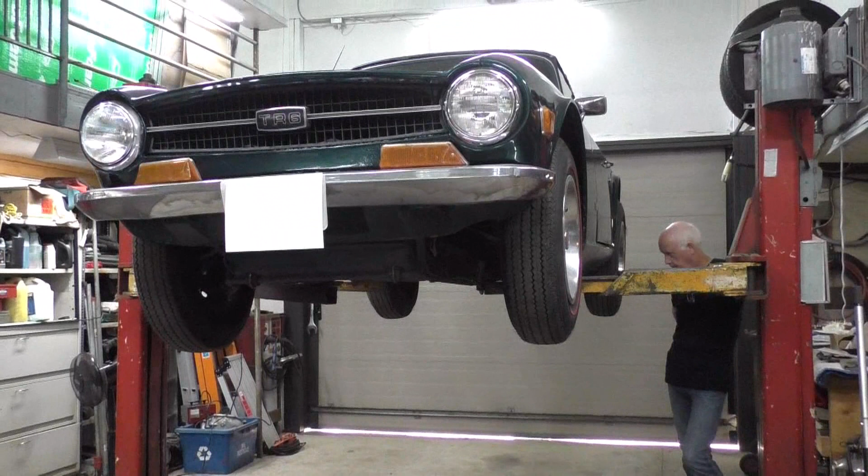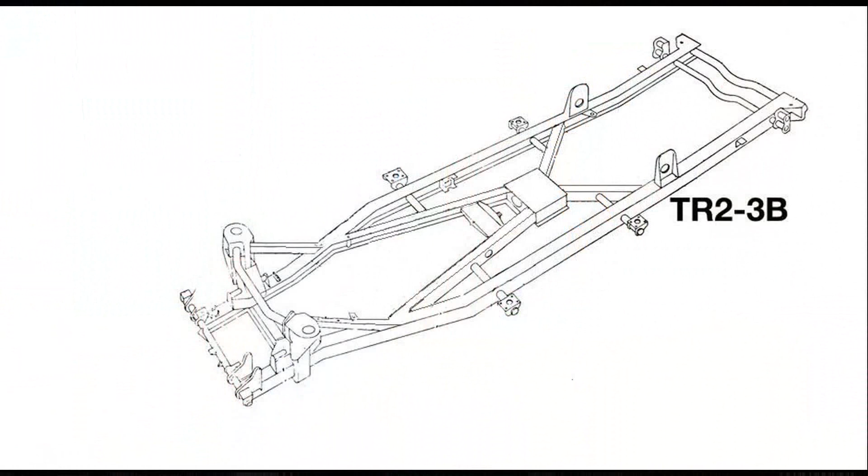Now, what I'd like to do is explain a bit about the frames on the Triumphs first, on the TR models. All of them except the TR7 and the TR8. They started off with the TR3s and the TR2s, and I have a diagram of a frame now, and as you can see on the frame, it's an old ladder type frame. A ladder frame just runs with two rails from front to back, and all the suspension hangs off it, and so does the body bolted to it.

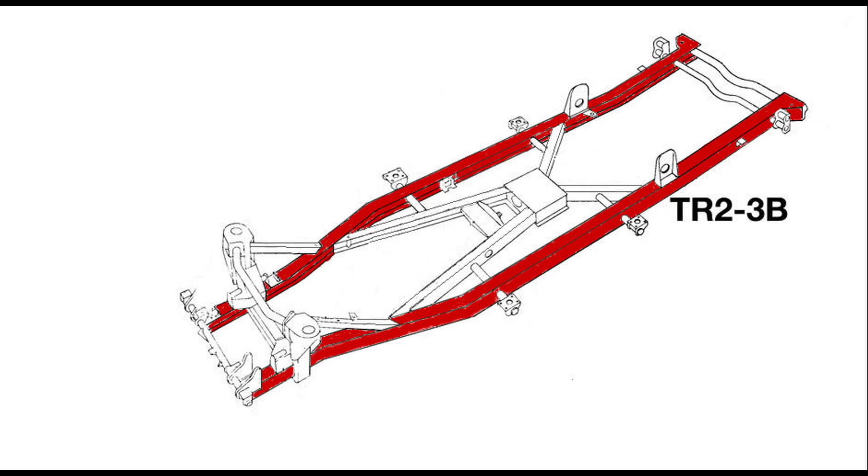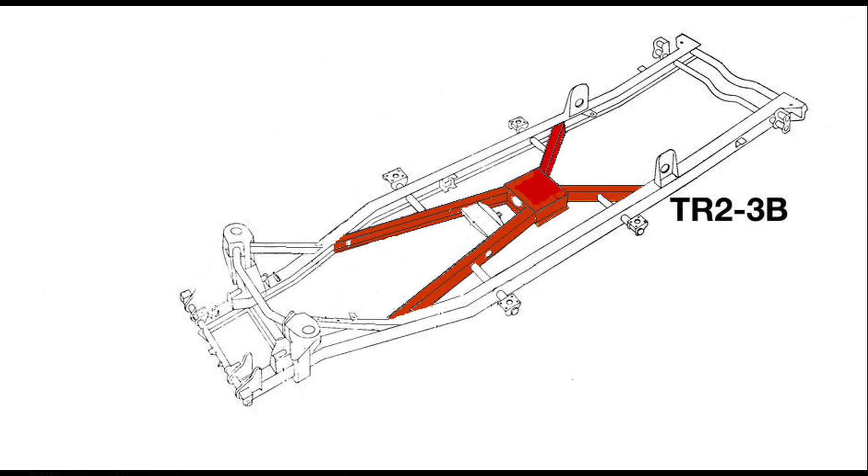You can see the two rails outlined in red, and these are the two frame rails, and as I say, they run from front to back. The problem with the ladder frames is they have a lot of flexing. They twist from one end to the other. So one of the ways that you can stop this happening is you put a cross piece in the center. As you can see, the cross piece goes from the front of the rear springs down to the tower support on the front for the independent suspension that's on the front.

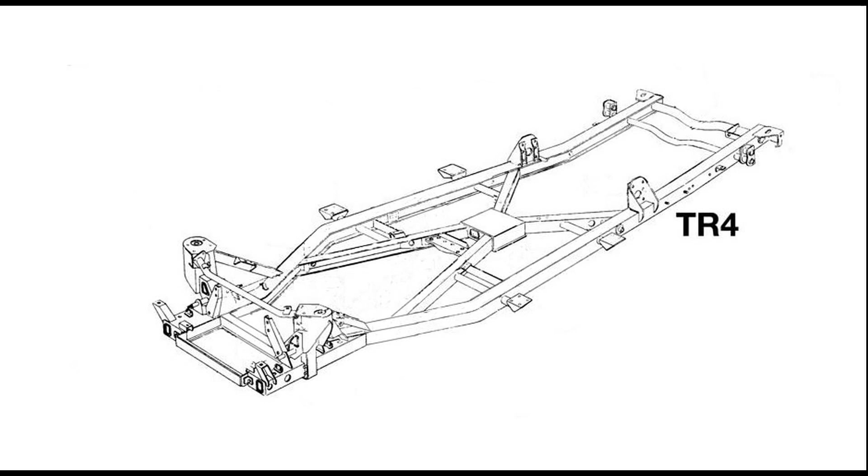Now if we go to the TR4 frame, you can see it's almost the same, except the frame rails are wider apart on the outside. This gives the floor more room inside the car. That's what they were looking for. And it gives the seats, you can put bigger seats in, all that kind of stuff. But it makes the car just a little bit wider.

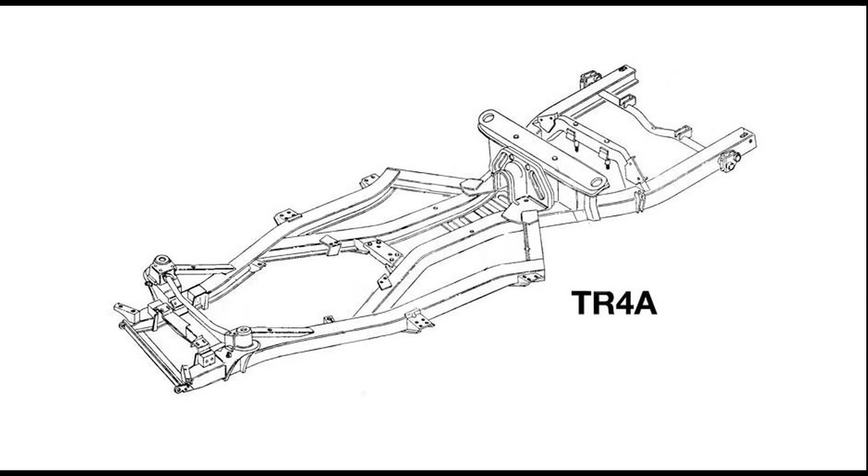So now progressing from the TR4 frame to the TR4A, where they put an independent suspension in the rear. And this changes the frame dynamics completely, actually. It's a whole different thing. But as we look at the picture, there are two main changes in the frame. There's an independent rear suspension, of course, but if you'll notice, there's a doubling of the frame rails. There's two sets go down.

Now you can see the frame rails supporting the independent suspension at the rear, and then going forward to reach the piece close to the tower supports. But instead of the cross in the centre, the support has basically moved to the outside of the frame rails.

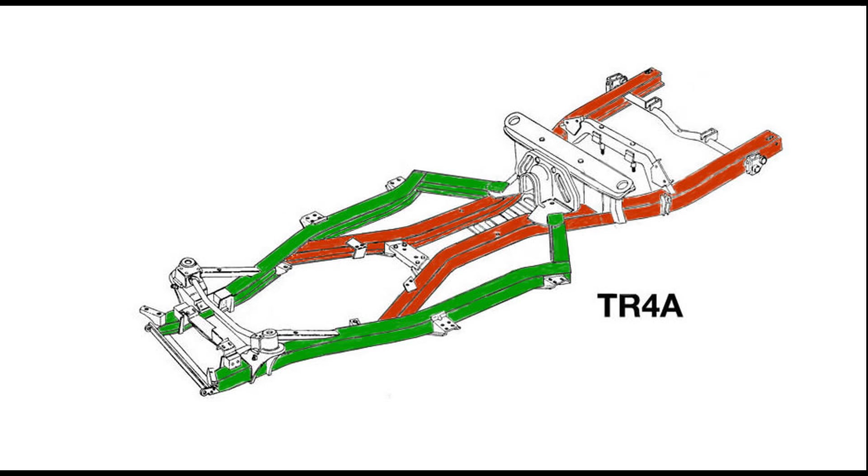Now the effect of this is that it makes the frame seemingly a lot wider, but what it's doing is connecting to the body now further out, nearer the sills and the rocker panels, and it's supporting it near the back. So in effect, it's almost like what GM used to call a perimeter frame. The frame's all the way around the outside of the body rather than just being on the inside.

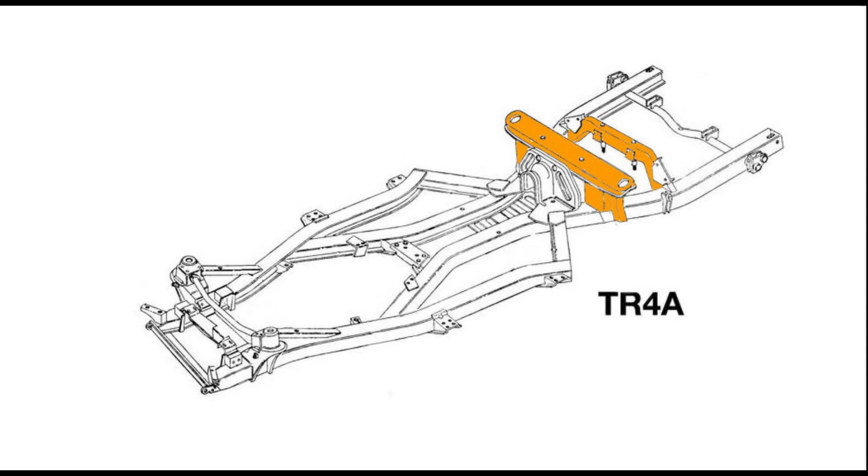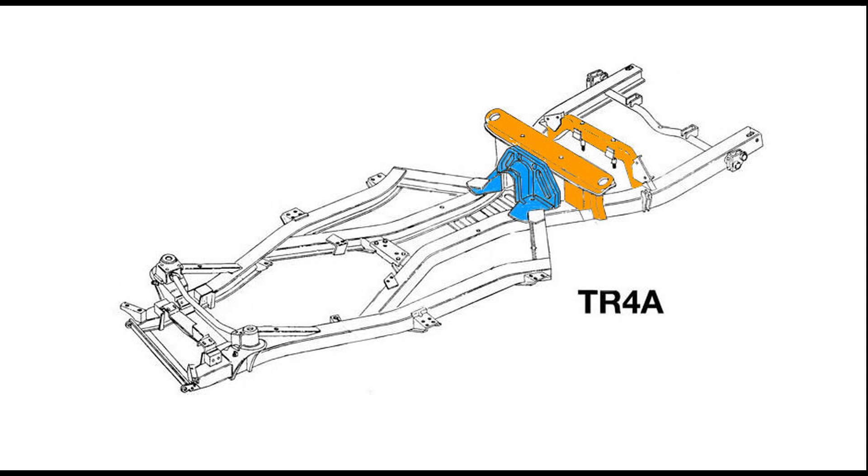Now notice where the diff is fastened to the two cross members, and they're 6 or 9 inches above the main frame rail. Now in front of it is a support that takes the torque of the diff and passes it to the main frame rails, because it's welded to it, so it passes the load and the torque all the way down through the diff into the main frame rails from the cross member where the diff is mounted, because the diffs are not directly mounted to anything else outside the cross members.

Just to explain things a bit further, when the differential is driving the wheels forward, the differential has a torque reaction of wanting to go backwards. So the thing it's trying to do is lift up the front of the frame. Now as we look at the picture of a TR6 frame, you can see that they've made some modifications. Some of them to me weren't really an improvement.

They took away the main support from the actual cross member supporting the differential, where it fastened it down to the frame rails going from front to back. What's happening now, the torque reaction from the diff through the mount is pulling the cross members back, while at the same time the wheels are pushing on the trailing arm mounts, and that's putting stress on the now unsupported frame rails.

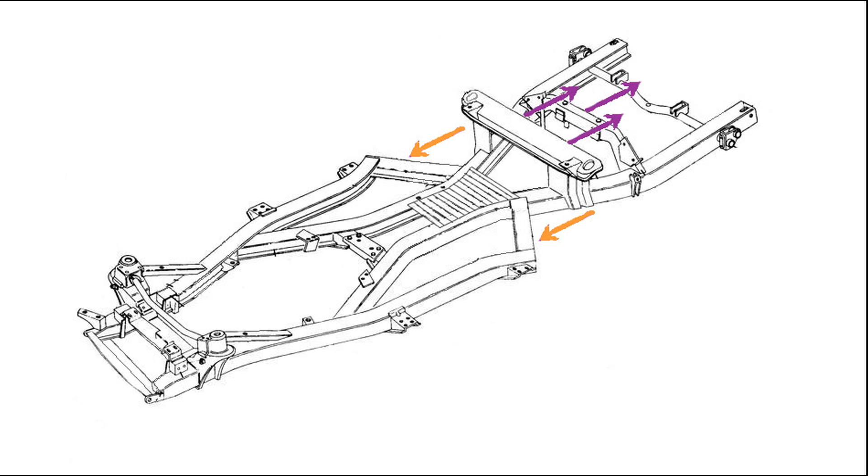Notice where the support on the TR4A is, where it's positioned, and now it's missing on the TR6 frame. So what happens, the frame starts to bend upwards just as a result of the stress and the twist, virtually the twisting motion on the back end of the frame.

I'm not saying that Triumph did a really bad job. I don't think they expected people to be driving the cars 50 years later than when they built them. Plus there was financial stress at British Leyland during the 70s, to say the least. That's when these cars were built. Penny pinching was the way to go. Unfortunately, the bit that they took out of the frame, I don't think it was a good idea.

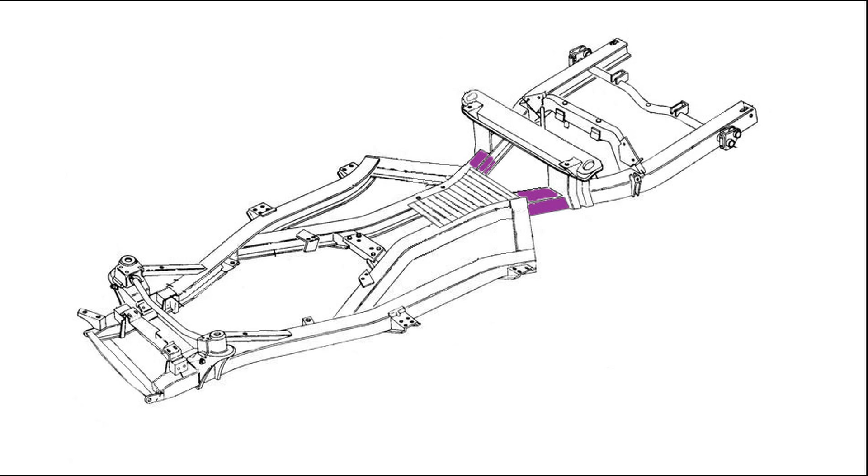But anyway, when people replace the arm that the trailing arm fastens to on the chassis, they don't look at the small section in between. And you might think, from what I've been saying, that there will be big holes in it or big cracks, but actually it doesn't work out that simple. I just want to show you something.

This is on a different TR6, one that has decent door gaps, but I'll show you how much movement there needs to be in the frame just to produce 1/2 or 3/4 of an inch movement on the top of the door. So we'll go and do that now. So I'm looking at the door gap on a different car. This isn't the car that has a problem. This is actually a fairly good car. It's got a nice door gap all the way down.

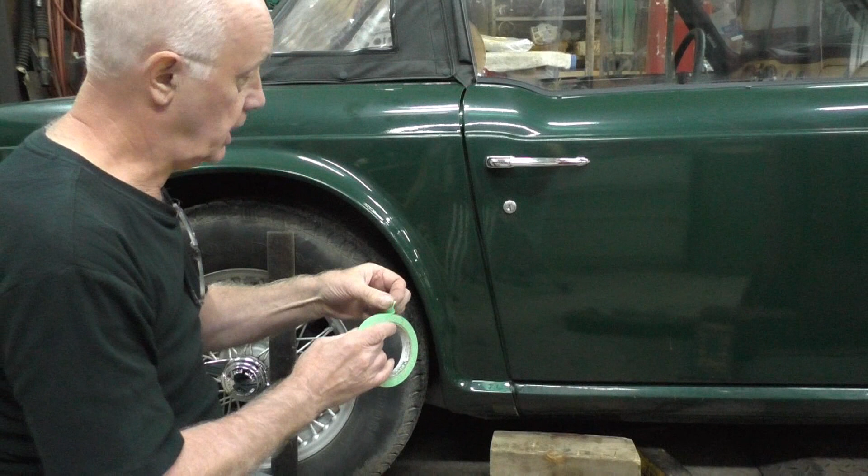But what I wanted to show you was, if you can just imagine this first, that the frame for the car is level with the rocker panel. The bottom of the frame is about the bottom of the rocker panel, and the top of the frame is just about where the top of the rocker panel or the sill is. So I'm going to get a piece of tape and stick it as a straight edge for us to use on here.

And then on the bit at the top, I'm going to stick it across, and I'm going to measure off here, calling this a door gap. I'm going to measure about 1/2 inch there. So that's what we're going to call the door gap. Now the depth of the frame is the same as a rocker panel. So I've got my straight edge here. I'm going to put this down on my block of wood, so I don't have to try and support it.

Now, if you imagine that this is the depth of the frame, that's the bottom of the frame, and this is the top, and our door gap is fine where it is. Now I've got to put my glasses on for this.

So now I move out the bar just to get a door gap of 1/2 inch. If you notice down here where the top of the frame is, we've only got probably less than 1/16 of an inch of movement on the top. So that's how much movement there needs to be in the frame to end up with 1/2 inch of a door gap. It's 1/16 of an inch or less.

So it's not like there's going to be big cracks or marks or anything else in the frame. That can deflect on the frame without too much trouble. 1/16 of an inch, even though it's small in frame terms, it's quite a bit in steering geometry and everything else. If you think of it the way that the frame's moving, if that's the bottom of the frame and now it moves to there, it gives you 1/2 inch, you've moved barely 1/16 of an inch.

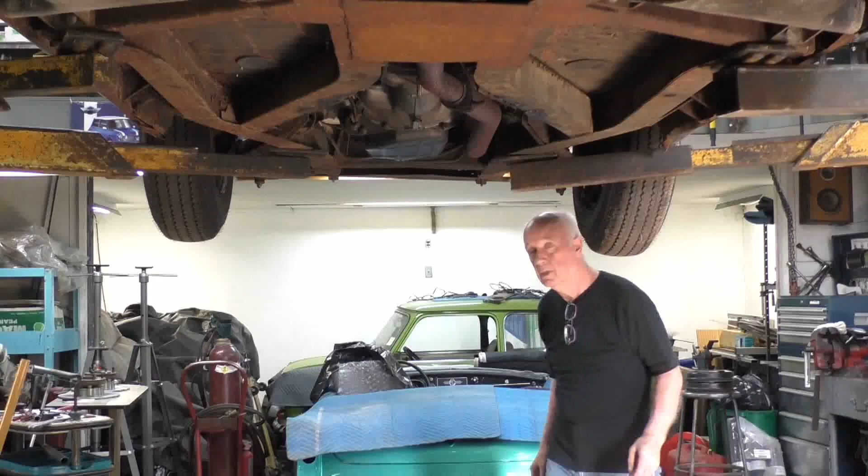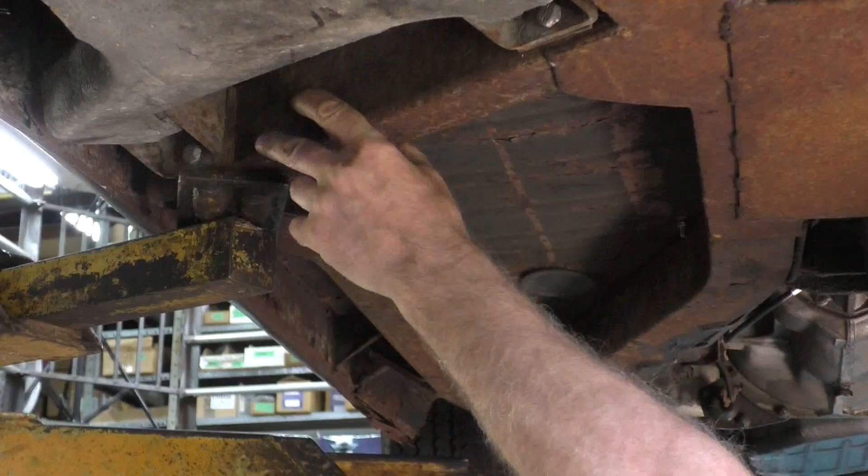Anyway, we'll go back and have a look underneath the bottom of the car. If we look on the back section of the frame, you can see there's holes in it already, it's rotted. And the arms on the side where the trailing arms for the suspension go have been replaced with a rectangular tube that's solid, and it looks like it's 1/4 inch thick. It's just been welded into the plate.

And then the centre section where it goes under the frame, where the main frame rails go from front to back, they've just had a 1/8 plate stuck on there and welded, and inside here you can see it's slightly rotten, and it's very weak around the top and right around here and down on the leg. And the area that I was talking about on the diagrams, between where the differential comes down and where it starts again where the arms are, that gap in here is really weak. You can see it and you can feel it because the metal's crunching.

So the amount of movement I need in here is very little, and after looking at the frame you can see exactly the area that's going to be a problem. And it is a problem because the door gap's opened up tremendously. And as I say, it's rotten all the way down there. And then move down the frame here and look along the sides on the main frame. It's not very good. We're looking at iffy bits.

And again, there's been little plates welded onto the arms. The rocker panels haven't even been welded. Somebody's put them on the outside, just folded them over and left the fold to keep them in place. And the same on this side here, you can see. And there's actually holes on the inner fender, which are pretty bad all the way along. Keep going down there, there's bits falling off, there's just holes everywhere. Pretty crappy.

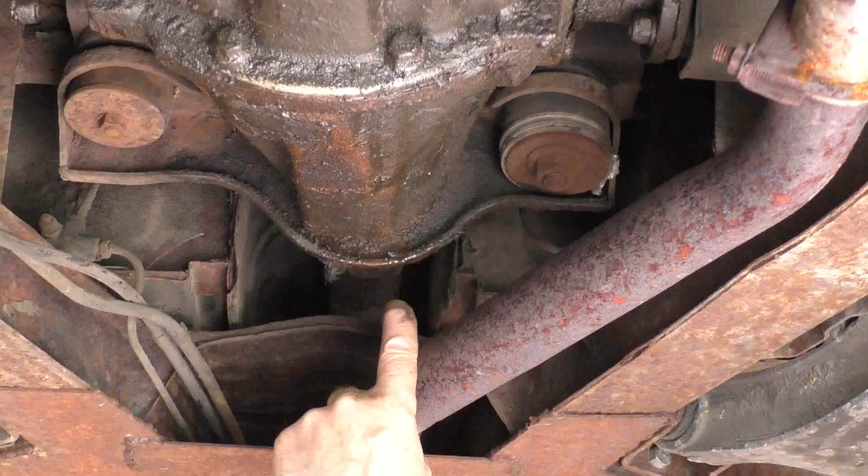One of the other things too, on the differential, all the bolts have been changed. The repair has had a piece put in the top and just bolts put through, but unfortunately the differential now is offset and it's also tilted, so the diff isn't in the right place. It's slightly off. With the U-joints on it, I suppose it doesn't make a lot of difference, but it's over to one side by about 3/4 of an inch, and a bit up as well. So the whole thing's a bit of a mess, the plate, the pieces put in.

And I don't know how well these wheels are aligned with the front wheels. They've got to follow the front. So if they're toeing in or toeing out, I don't know if that's been done. So all in all, the thing's pretty crappy. It's not something I would want to get involved with. The only way you could fix this is take the body off and start again with a frame, preferably another one. Anyway, that's it.